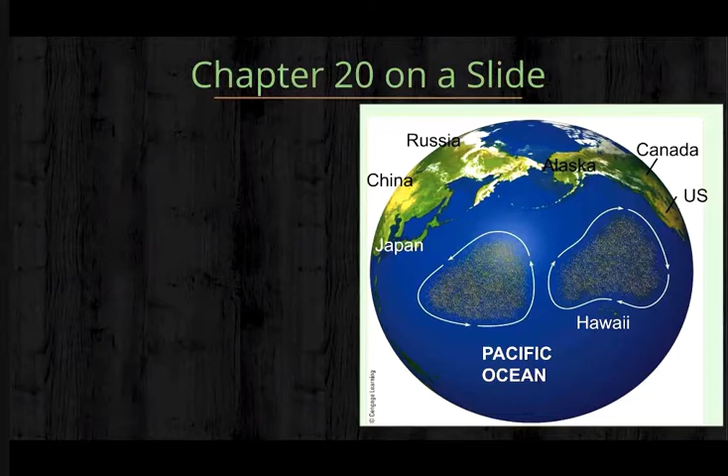Okay, chapter 20, you guys were supposed to look at last week. If you didn't get a chance, in one slide, basically the key points were that there's the Great Pacific garbage patch, a lot of plastic floating around the ocean. There's actually 2 of them. They're huge, as you can see from the picture. They went on about how bottled water is kind of evil, and the companies doing that are all pretty bad. We usually like to give more nuance in this class, but bottled water is pretty bad. Just drink out of the tap, it's usually safe, especially in Boston.

Eutrophication was a theme. Please be able to explain how eutrophication happens.

There are other ways quality of life with respect to water is improving. Many countries no longer need to worry so much about having access to clean water, though it can still be far away. It's improving.

Inventions like the life straw allow people to drink directly from, quote, dirty water and filter it right there, then and there.

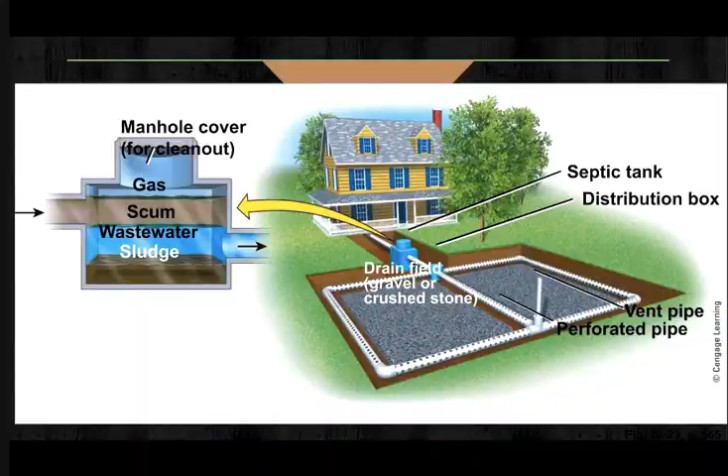What happens at the treatment center? What kinds of things can we clean, and how do we clean them up? There are basically three steps, and the first section is called primary filtration.

In primary, that's a physical filter. They literally have a screen that gets some of the sludge, and they allow it to settle over time as particles settle down. You don't need to know the name of every chamber, but the big particles basically settle out of the liquid. You physically filter it, nothing chemical there.

Then the second step is that you give it to bacteria which like to eat poop and other sewage, the bacteria in this activated sludge in the middle, plus oxygen, allow it to purify the water. And then you kill the bacteria with chlorine.

That's it, the primary and secondary stages, that's how we treat sewage. I don't know your thoughts on that, whether that seems clean enough or you're surprised that this is all that happens. But really, this is kind of what nature does too.

We've talked about how forests or wetlands will purify water. They also have this kind of primary stage where roots or rocks and just slowing down water will allow particles to settle out. Then plants will take up the nitrates, or bacteria will eat up the toxic material. After that treatment, it's all sent away to the river, lake, or ocean.

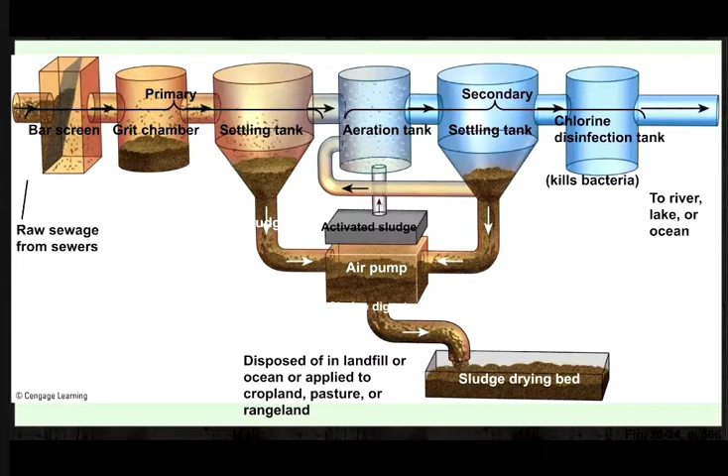I think I have a slide just outlining those words here, but I'm going to skip through it if I can.

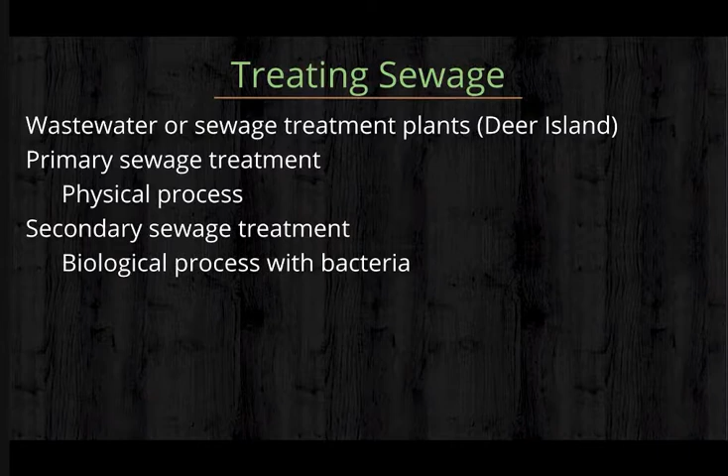Chapter 21 is our final chapter of new material. Congratulations, you've made it. It's about solid and hazardous waste, so let's get to it.

The core case study differs by book. One talks about the cradle to grave or cradle to cradle paradigm, and one talks about e-waste. I was going to talk about e-waste since we've already covered cradle to grave.

There's a question about whether sewage processing is being advanced, or if it's currently good enough, or if there's an alternative people use. Right now, the choices you have are basically between treating it or not treating it.

There's also a tertiary step beyond primary and secondary treatment. Some places require additional UV treatment or special chemicals to treat the water. But most places by law, or in the US, are only required to do primary and secondary treatment, and a lot of loopholes exist so places get around even doing that much.

I feel like right now the focus for government is to make sure everyone implements primary and secondary treatment, as opposed to finding a new way to treat it, because the alternative is just dumping it straight into the river, which people already do, because rivers are natural filtration systems.

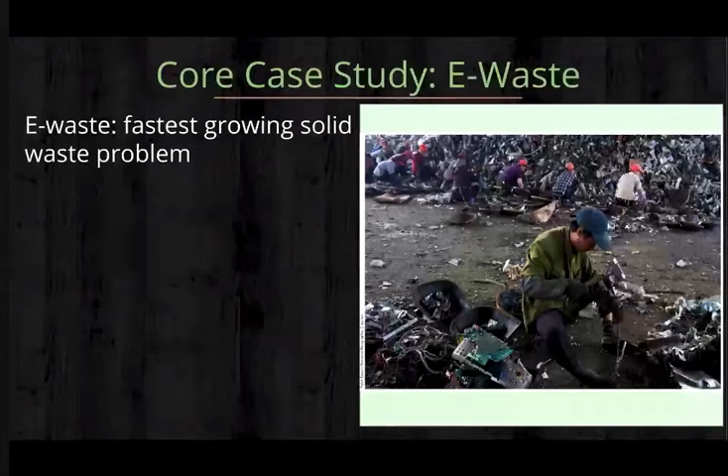A lot of it ends up just getting thrown away because people aren't good about recycling it. It ends up in landfills or incinerators. That does not happen in the US though - usually we ship it off to another country. And that's really a huge waste.

The composition of these devices includes those precious metals we talked about - conflict minerals like gold, tantalum, tungsten. So there are valuable minerals in there, and a bunch of plastics that could be reused, including high quality plastics. We'll talk about how there are different types of plastics.

But it's also extremely toxic. When we ship them off, other countries want them because they can reclaim those plastics or valuable metals - they need it for their economy. But they're also subjecting the workers there to very bad conditions.

When you burn these plastics to get the valuable metal out, you don't want to breathe in toxic fumes, like the smell of burning plastic. It's not good for people - there are toxins involved, so it becomes a human rights issue as well.

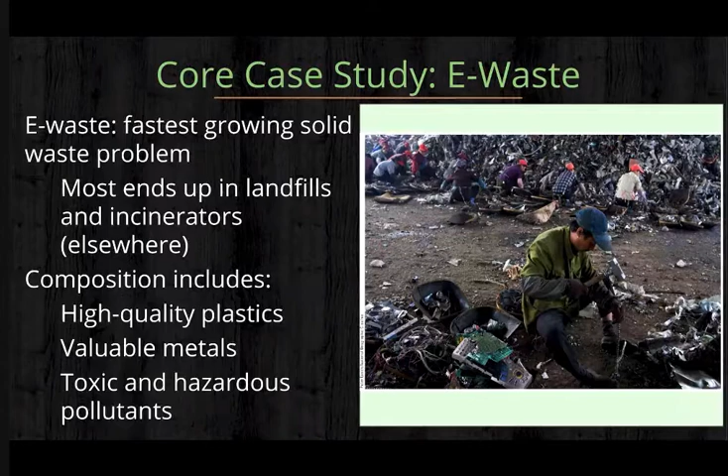As I said, we mostly ship it to other places - 70% of our e-waste ends up in China. And of course the conditions for work there are already worse. There aren't as strict laws as to what conditions workers have to work in, and of course there are also child workers.

The US produced 7 million tons of e-waste, basically 42 pounds per person in a year. You might think, I don't have 42 pounds of computer - sure, but if your family throws away one washer or one large electronic device, that can affect the average. And of course companies' waste all averages out per capita.

People are bad at recycling e-waste - more than 50% of it ends up in the trash can. And even though it's a small amount of the total trash we produce, only about 2% of the volume in our landfills, it accounts for most of the heavy metals - two thirds of them.

Heavy metals here just means all the transition metals on the periodic table, things that aren't probably good for you - like lead would count as a heavy metal, mercury would count as a heavy metal.

All of this is fed by our consumerist mindset - the fact that we plan for cradle to grave. These electronics are not designed for reusing their parts. Planned obsolescence is where manufacturers literally plan for a device to only last a couple of years before you need to replace it, instead of designing it for how you can keep using it longer - whether it's a software update that makes your iPhone slow or anything like that. Questions about e-waste?

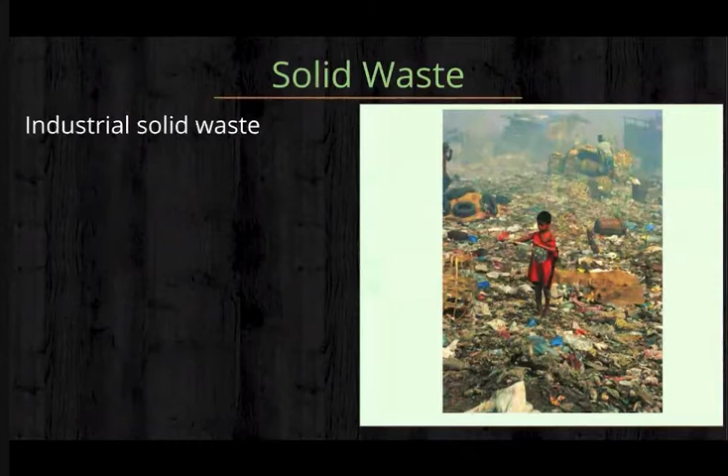All right, so the 3 big ideas for this chapter are about solid waste in general, the thing you've heard before: reduce, reuse, recycle, and how we address hazardous waste. So what is solid waste? Solid waste comes from 2 different places, or 2 large categories. One is industrial solid waste, produced by industries, things like farms and mines. And then there's municipal solid waste, often abbreviated MSW, which is the typical trash we generate, but also the recycling and everything else that you throw away.

Based on what we've learned so far, what percent of waste do you think is industrial? You can type it in the chat or say it out loud. 75 industrial, 25 industrial - these are very different numbers, they're like the complement of each other. It's okay. 25 is industrial, all right.

You might remember from chapter 14 on non-renewable minerals, do you remember those mountains of overburden when you mine a material, when mountaintops were removed and giant piles of waste created? It turns out that mining alone is more than half. So industrial waste - there are estimates, and this number is put into question because it's very hard to count waste, but everyone seemed to quote the same number of around 97% of waste being industrial.

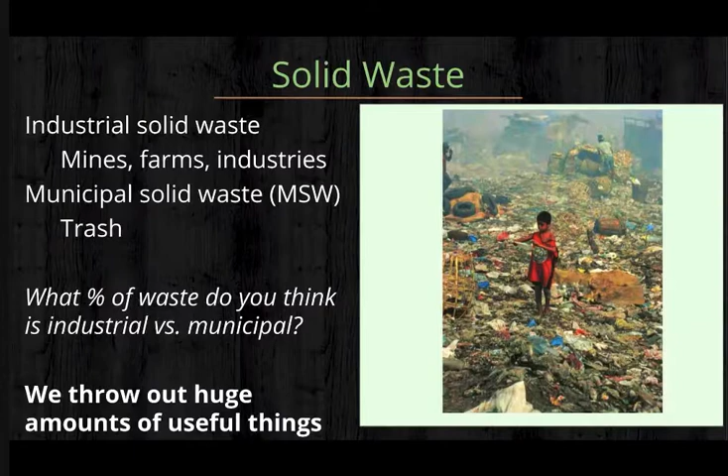But we throw away lots and lots of useful things. What goes into the landfill usually does not have to go to the landfill - we can do other things with it, and yet we still throw it away. So as far as your life goes, what kinds of things do you throw away most? Which waste that you generate is worse for the environment? I heard food packaging earlier was a big one. But maybe life before coronavirus, before the closure, what was your biggest source of trash? If you had to carry your trash around with you, what would that trash bag look like?

Again, say it out loud or type, or just think to yourself. Cans, lots of cans. And bottles, wrappers, food packaging. So bottles, of course, we could use a metal water bottle instead, but that's fine. Still plastic food packaging - food packaging is a lot of it. All right, so I guess we'll talk about recycling a bit too.

It's interesting that you all say food packaging, but maybe not food. Maybe you're all great about finishing your food, but food waste is actually a huge portion of the waste we generate as well. Think about all the schools and all the school lunches, maybe even as a small set of the food that gets thrown away in the US every day.

You will all soon be going to college. Can you imagine moving out of your college dorm room? Just the amount of trash generated on move-out date, which was made worse this year because of the coronavirus and everyone leaving - it's just a huge mound of trash, usually a bunch of usable stuff that people bought for one year and then had to throw away because they couldn't take it home on a plane with them. These will just be two things relevant to your daily lives, maybe, or you'll see it soon.

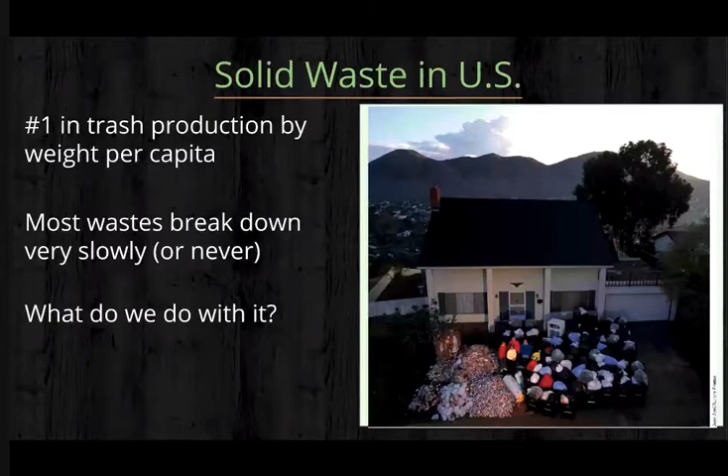Okay, you could litter it and it goes into the ocean, drains directly. You can burn it, it's true. So some people for the energy unit were like, let's collect all of the trash in the US and burn that to generate energy for Massachusetts. You can recycle them at a can center. What else can happen? Compost, I agree. I think that was most of the ones I wanted to say.

That's good enough. So we have trash generated at 2 steps. Trash is generated in the processing and manufacturing of goods, that second blue square, I guess, and then it's also generated when we use it. So pre-consumer, there's trash made; post-consumer, there's trash made. We can recycle it, we can compost it. Hazardous waste has to be dealt with separately. Or in the remaining stuff, we can either burn it for energy or throw it away. And then even when you burn it, there's ashes made, and that has to be thrown away. So this is kind of what happens to trash at a very broad scale.

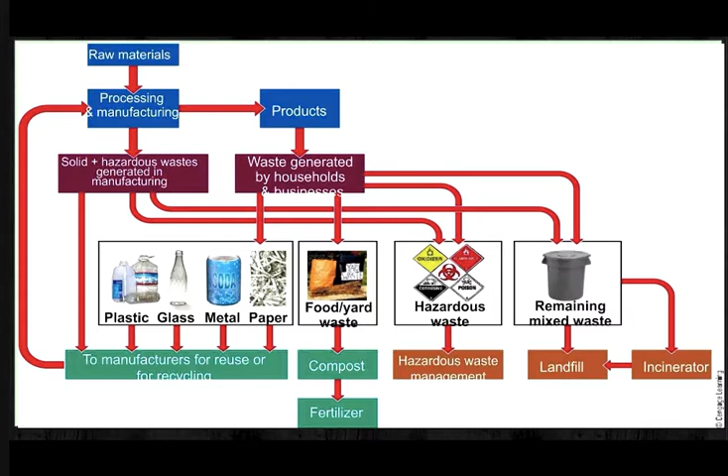Right now I want to talk about the very right-hand side of this diagram: the remaining mixed waste, incinerating it, or landfills. This diagram should come as no surprise to you all. This is kind of how we can get energy out of trash. Remember, at the top right here: steam, turbine, generator, electricity. This should be a very familiar story from chapter 15 and 16. Anytime you can get water moving to turn a turbine, you will get electricity. So they boil the water by burning trash, and then they move the ash away to a landfill, but the water will turn a turbine to generate electricity, and that's fine.

Of course, this option does generate a good amount of pollution. When you burn plastics, as I told you earlier, it was hazardous, so it makes a lot of air pollution, which can be bad for the people who have to live near these kinds of plants. It also is a problem because if you're buying trash, you're creating a market for it and therefore encouraging waste production. There are some countries that get most of their energy from this kind of process, and then they actually need to buy trash from other countries. They run out of their own trash, which kind of sounds good because you don't have trash, but then it's also bad because other countries are like, let's make more trash to sell it, or at least there's no incentive to reduce the amount of trash they produce in the first place.

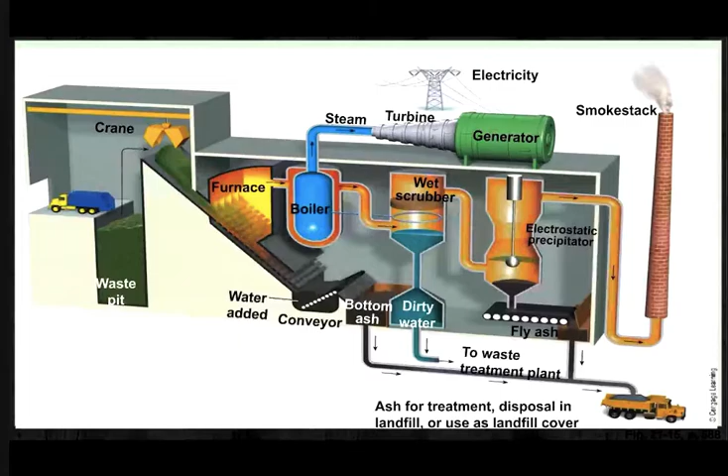One of these trade-off pages again: it's good to burn it because now it just becomes ash, less of it has to go to a landfill, and it makes energy. But it's expensive and hazardous.

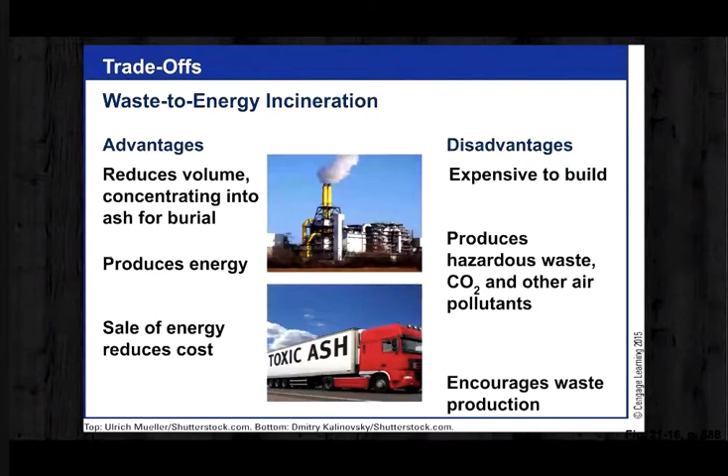The other thing that we do, of course, is put it into a landfill. This is a diagram of a landfill. Basically, the idea is that around the compacted solid waste—you have to compact it so it takes up less space—there's a bunch of lining. These are called sanitary landfills. It's not just an open pit somewhere; that's not what we do in most developed countries now. We line this area with clay, and we have monitoring wells to make sure that the water from the trash, called leachate, doesn't get out. Basically, it's like a sealed kind of landfill area.

Has anyone heard that landfill space is going to run out, that there are too many landfills and we won't have places to put our trash? Is that a sentiment people have heard before? If not, that's fine, but your parents may have heard of it. That was one of the pushes for generating less trash and recycling more—because landfill space will run out. That's not really a problem anymore, but there's a video linked in the weekly outline documenting some of those sentiments from the 1990s.

There's a comment about Millennium Park. Do you want to explain that a little further? Is Millennium Park in Boston, a landfill? I don't actually know where it is. Okay, it's in Boston, but it is a landfill. Thank you—near Home Depot, for all of you listening.

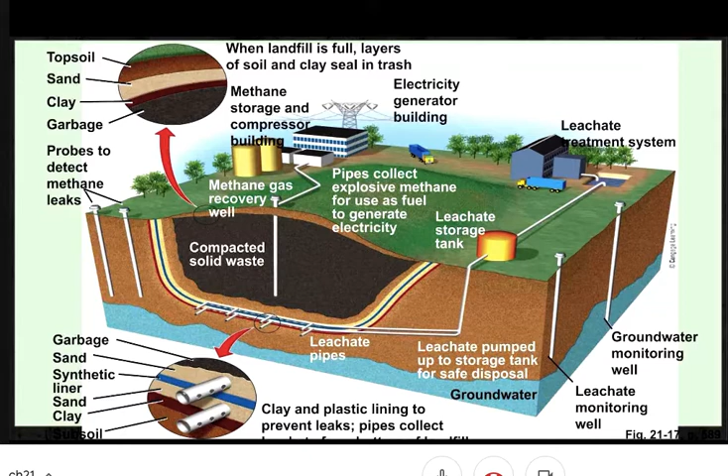So again, a landfill is fine because it's pretty cheap—you just dump it there. You can pour tons of waste in there; there's lots of space for it. But of course, it's still not great to live around because it can leak and contaminate your groundwater. You also get extra noise and traffic from all the garbage trucks dumping things there. And when you have a bunch of rotting stuff, it releases greenhouse gas. There are technologies where you can capture that greenhouse gas and burn it, but it's still a bunch of decomposing stuff—it's going to release greenhouse gases, just like any other vegetation left to rot.

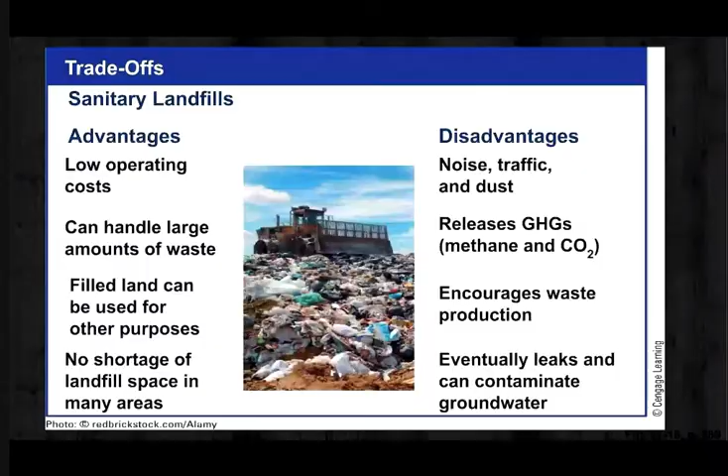Okay. Questions about solid waste, landfills, or incinerating it?

So the options when it comes to solid waste, once it's already there, aren't the best. You've probably heard of reduce, reuse, recycle in elementary school. But has anyone heard of the 4 R's? Is that a thing that you do? Yes, I'm seeing some yeses.

So let's say you go to college and you're required to be on a meal plan, because you generally are. In the dining hall, they use disposable containers for every single meal—this isn't even a stretch of the imagination; they do this at Brown, for instance, in some of their dining halls. There's a compost bin, a trash bin, and a recycling bin. What should you do to be most sustainable? Either out loud or in the chat.

Hoard them—so Alfie will take them and reuse them. Hoard them and use them for other things; they're pretty durable. Ask the college to get reusable ones, like petition them to do that. That change happened while I was at MIT—they switched from disposable takeout containers to reusable ones. Definitely implementable.

Other ideas? You can definitely ask the college to change. It would take a while, but we'll see.

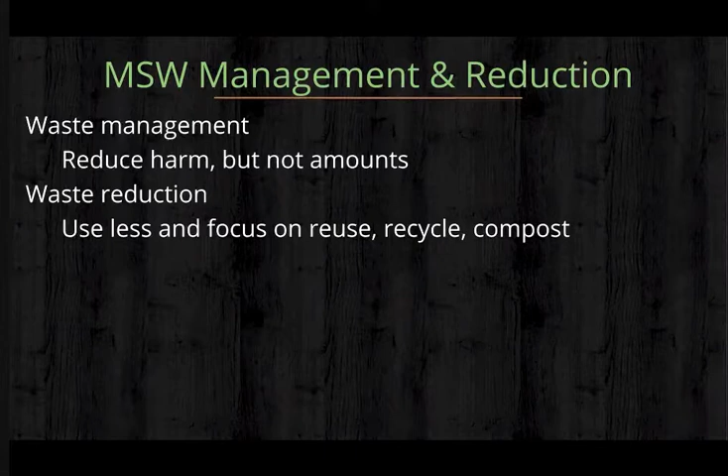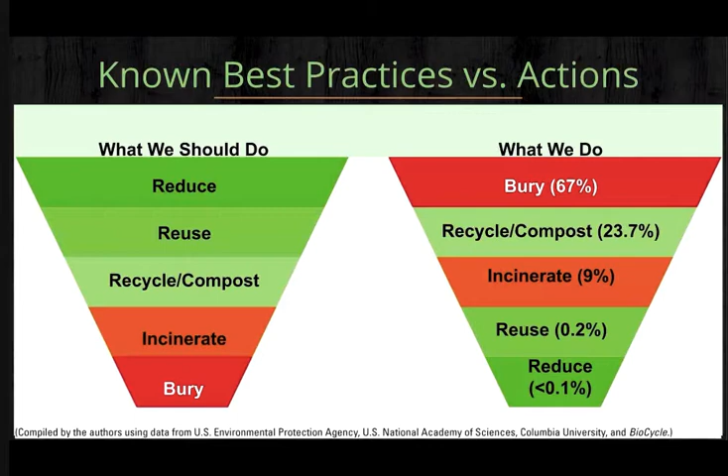So how do we reduce? This is where the 4 R's come into place. What are they? Of course, recycling. There are two different ways you can recycle. There's primary recycling, which is like a closed loop - like I'm a water bottle company and I collect my water bottles and make more water bottles from those same bottles. That's not losing any resources, but it very rarely happens. Most of the time it's secondary recycling, where I take a bunch of water bottles, melt them down, and make something different, or make new products out of them.

I guess using it to make other things. And then you can also reuse. This is in order of priority - it'd be better to reuse, to use it over and over. Like someone said, hoard the takeout containers and use them a couple times more, maybe half your waste use that way. You could also, of course, reduce, like use less of it.

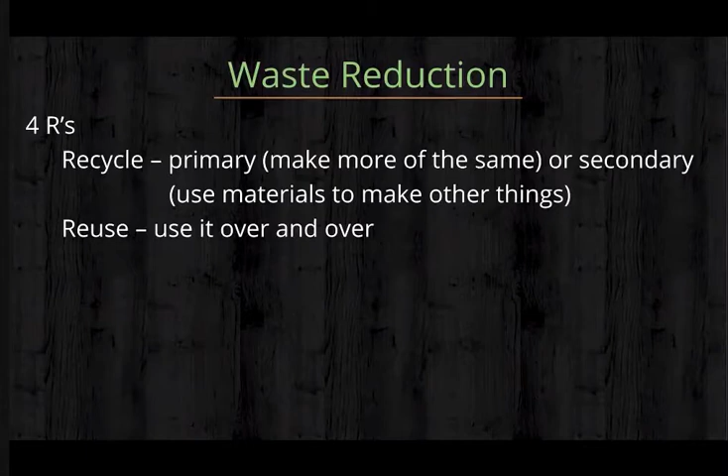What is the 4th R of these R's? What is the thing that's better to do than all of these? Yeah, it is to just refuse. So reducing is more like reusing, but refuse means don't use it at all. Just say no. There's a big difference in mentality where you go from 'I'm going to use this less' to 'I'm just not going to use it at all.' It's kind of like the difference between 'I'll eat less meat sometimes' versus 'I just won't eat meat at all.' It requires a bit more commitment to be like, 'I'll bring my own bowl, I'll just never use it.'

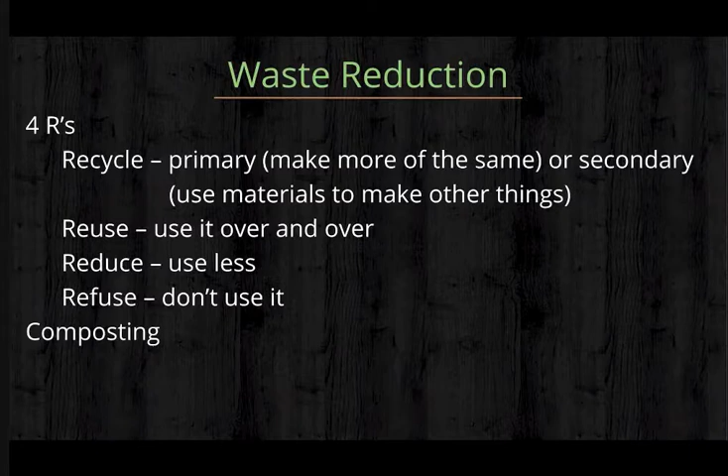And then, of course, we can also reduce by composting, which is where we turn waste naturally with decomposers into soil again. This takes a few months, usually, if not longer. You've probably all seen those compostable bags, compostable packaging at this point, right? Compostable plastics, biodegradable plastics - sometimes they're labeled as biodegradable, but the composting company won't actually accept that anyway because it takes too long to degrade still.

So maybe a company will say, yeah, we use compostable packaging. They send it to a facility that degrades them, but the facility uses, let's say, 30-day cycles - you have a batch, it takes 30 days to decompose, then they take it out. But the plastic bag maybe takes 90 days to decompose, and the facility won't actually accept those bags because it takes too long. They don't have the time to filter them out and give them 3 cycles. So that just goes to the landfill anyway, or gets burned anyway. A lot of the time, that actually happens to both our recycling and our composting. A lot of the time we feel pretty good just taking the step to separate these, but after that, at an industrial level or higher level, it doesn't meet the end that we think it should meet.

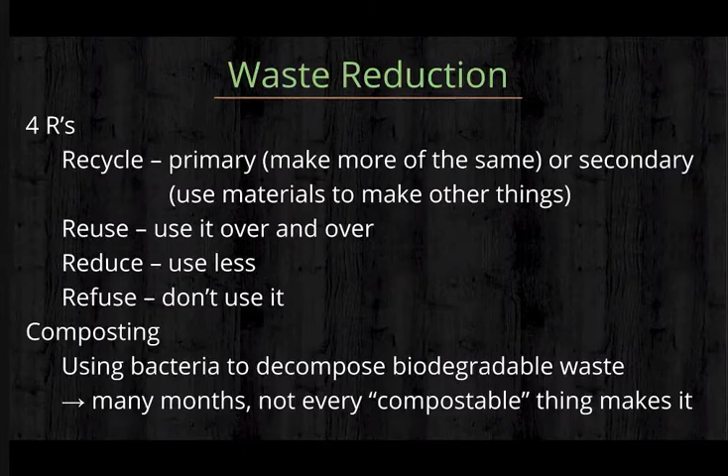So this is kind of sad news - I know BLS does a great job of collecting recycling, for instance, but not all things are actually recyclable. First of all, not all plastic is even recyclable. You may know this already, but there are those triangles with the numbers in them. Which of these numbers, 1 through 7, are actually recyclable? There are some pictures of things commonly made out of these plastics. Which of these numbers actually are recyclable, like will be used to make other things?

I see a vote for 1. I see a vote for 2.

Alright, so I'm telling you right now, not all of it's gonna happen.

When you see these numbers on plastics, they're just classifying the types of plastic, and there are a lot of types in use. Very commonly, no one disputes that numbers 1 and 2 are recyclable. Plastic bottles of type 1 and 2 will be used to make more plastic bottles. PET, and HDPE, high density polyethylene, are easy to reuse. Remember in the energy unit we talked about having high net energy? It was profitable to do it. Companies generally think it's fairly profitable to melt these down and make new things from 1 and 2.

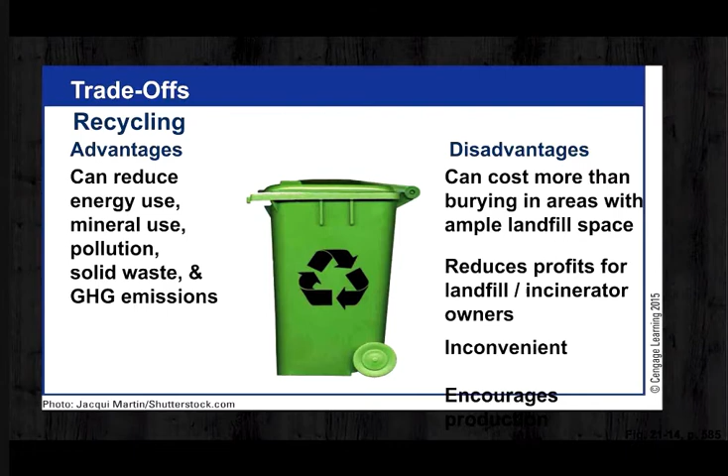So far that sounded kind of depressing, but there have been improvements with respect to trash management. What kinds of improvements can you think of that have happened in your lifetimes that you've noticed? You can type.

Hazardous waste disposal, we're going to get there in a bit. Boston got the big blue recycling bins. Schools recycling in general, I agree, BLS does a great job of that.

And maybe the things that I'll say later are going to remind you of things that have actually changed, or that you didn't realize changed. They're just so commonplace now.

But some things include the fact that we pay for our shopping bags now, right? You don't just use plastic bags all the time. That's great. We used to use, I think, 3,000 bags a second or something in the US, 3,000 plastic bags, which is a ton. And now people are much better about reusing bags.

In a lot of cities, there's actually a pay-as-you-throw system. Plastic straws were worth it. I'm not sure what you mean by that, but pay-as-you-throw, bans on styrofoam.

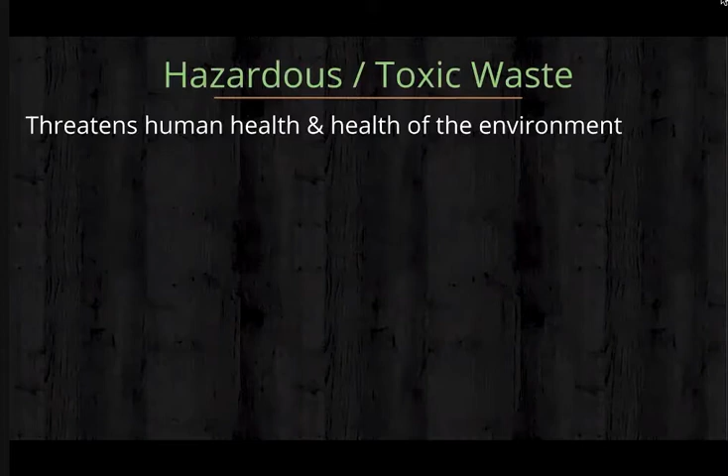We've talked about things like organic compounds, these persistent organic pollutants, or POPs, like DDT. There's toxic heavy metals, the transition metals again, lead, mercury, those kinds of things, as well as radioactive waste. All of these things are considered hazardous. We've touched upon all of them as well.

How do we actually deal with it? Like when you use copper in the chem lab, what happens to it? You're not supposed to pour it down the drain, and that's because it needs to go to a special treatment facility.

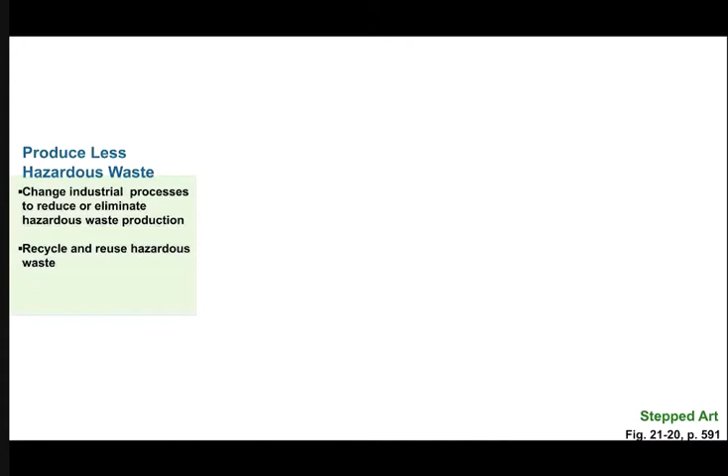What can we actually do about this? It's kind of a similar theme as before. You produce less of it in the first place, whether that's designing your electronics more friendlily so you could recover those toxic wastes and recycle or reuse them. But if you can't do that, you can make them less hazardous.

Sometimes we just let it sit on its own, like for radioactive waste, we just wait. Sometimes you can burn it, because burning is a chemical reaction, so it changes the composition of the thing, so it's no longer toxic. You could burn plastics and make carbon dioxide out of them. That's a thing you could do. You could also treat them with other chemical reactions or biologically. And of course, you could also just dilute them and hope that it doesn't have a big effect at a small dosage.

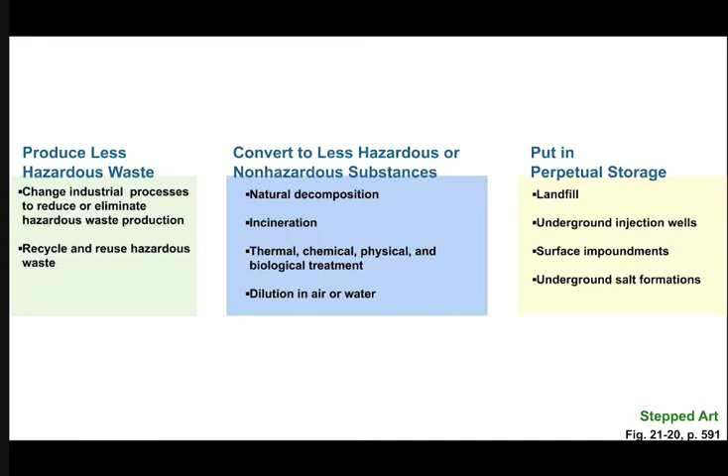After that, though, if you can't convert it, you're going to have to store it forever. And that's what we do with the radioactive waste, so radioactive treatment plants kind of last for a very, very long time. You can inject them underground, that's a thing we do. Or we can just put them in basically extra security sanitary landfills, surface impoundments, where you keep it at the surface but have double linings and such underground.

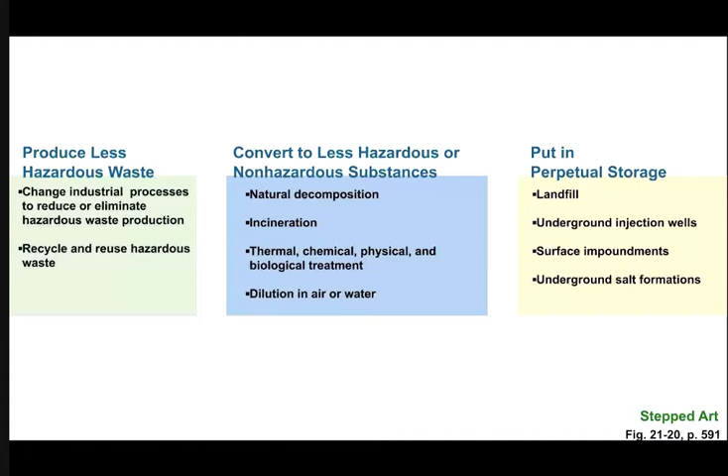But you can actually treat pollutants naturally. Learning from nature, a bunch of plants can actually take up the pollutants for you. They can absorb even radioactive compounds, and the plant will sometimes survive, and when it dies, it just becomes part of the soil at a more natural pace. They can take up nitrates, break down some toxins, and absorb CO2, which is classified as a pollutant.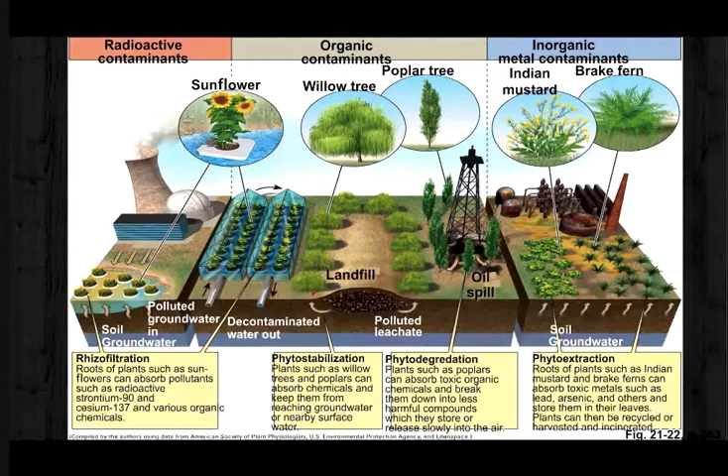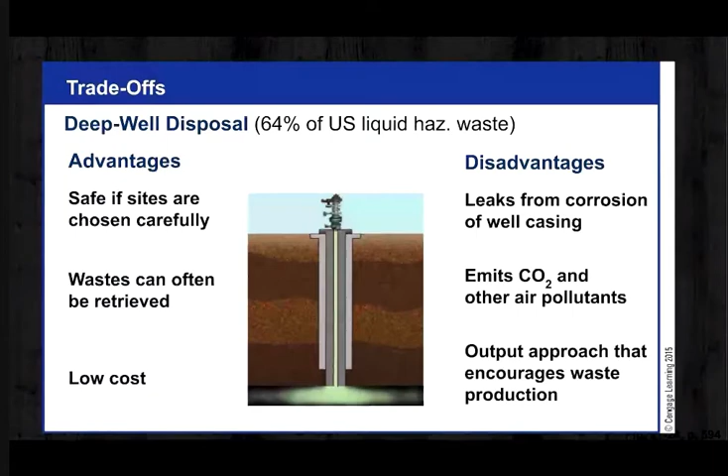There are deep wells, which have trade-offs too. We're worried mostly about leaking and the pollution involved, as well as surface impoundments. Both are pretty cheap, but the pollution and leaking are problems both times.

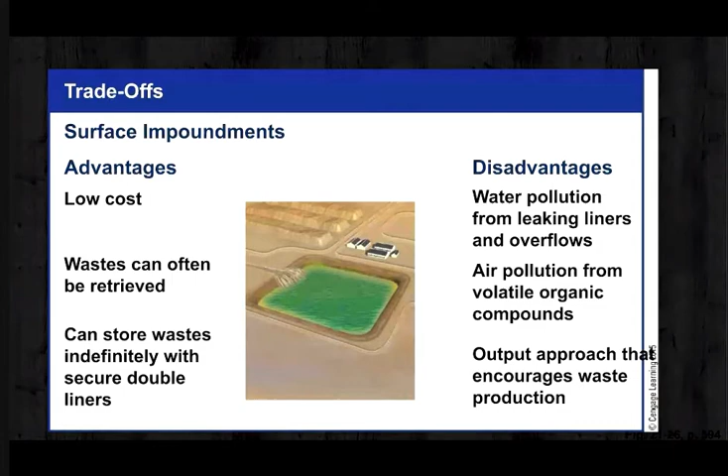We're near the end now, but I wanted to remind you that Love Canal happened. That was in New York, where we had a toxic waste site, and a bunch of mothers took the issue hostage, basically starting a grassroots movement to change something. From that we got CERCLA, a law that provides money in the U.S. to create these Superfund sites, places that have been contaminated in the United States and need toxic remediation.

Have I already asked you guys how many Superfund sites exist? I don't remember if I did, or if that was my chem class. All right, how many do we think exist in the U.S.?

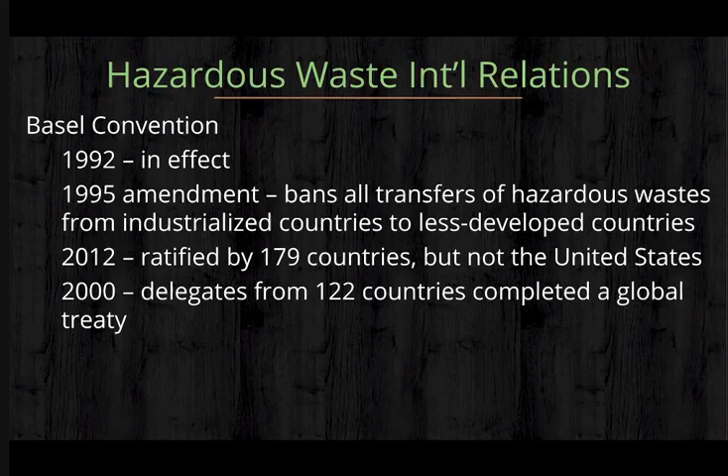Okay, questions? So I want to end with the idea that really the goal here is a low waste or even a no waste society. Cities have dealt with this in many ways. Next week, when we bring everything together in urbanization, we'll look at some of the things cities are doing to become greener. But some cities, if you click on that link for the APA, will say that near net zero waste, or zero waste, is a philosophy and not actually a number we should measure, which I think is ridiculous. Whereas other cities are saying that means we send nothing to the landfill. A lot of cities are committing to a zero waste goal.

I think San Francisco is doing quite well and had an 80% reduction in the amount they sent to landfills and incinerators, but will not meet their 2020 goal, or have not met it. They are doing quite well overall, though.

So for all of you who said in the beginning, I don't think it's possible that my household will ever make no waste - I kind of thought that too, and then I came home and saw that we had different sized trash bins, and we were actually generating just one bag of landfill trash a week. I was very surprised at the change that's happened in my house just from pretty small, nudge-level things the government has done. Your book has key principles about how everything is connected in biogeochemical cycles - there's no real way you're throwing it away, it's going to stay there for a very long time. The producers and polluters and people who make the trash should pay, and mimicking nature by recycling and composting are the things to strive for.